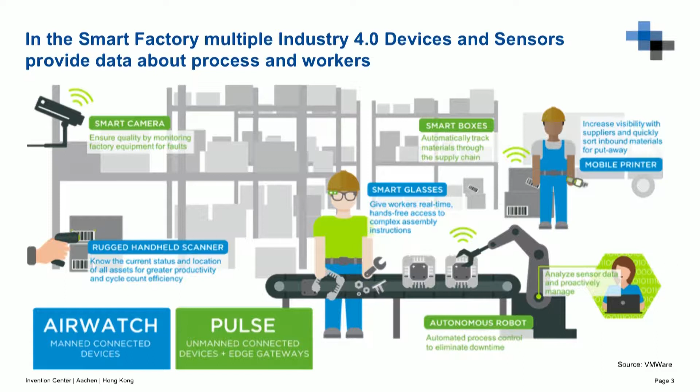What happens right now in the manufacturing industry is that on a shop floor level, where the actual production is happening, IoT - what we call IIoT, Industrial Internet of Things - is introduced into the production environment. This can be like a camera system. This can be figuring out about getting maybe smart glasses on the worker, understanding the maintenance cycle, how you maintain your products. It's about knowing where your product is basically running through the production process. We call this an intelligent product - you know where the product is, and the product tells you what processing needs to be done in order to add value.

So all those devices are basically generating a whole bunch of data. And on all those data, you can actually say they are like oil in the 70s - they are crude data you need to use to make sense out of it, to create value, to make a business opportunity happen. So how can you actually go, specifically for the manufacturing world, from big data generated by all those decentralized devices in the production, in the shop floor, towards making sense out of it - towards smart data?

So there has been a study by a consultancy company that was interviewing top-level management people, asking them: what do you do with IoT and data analytics? Why do you need it?

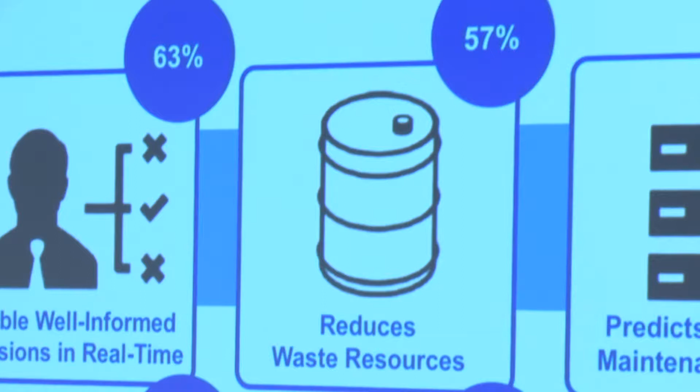Reducing waste is a concept coming out of Japan, from the lean production principles. Making things lean means reducing waste in your production cycle. Waste is always something where you basically lose money at the end of the day. Now you can use IoT technology and data analytics to help reduce waste in your production process.

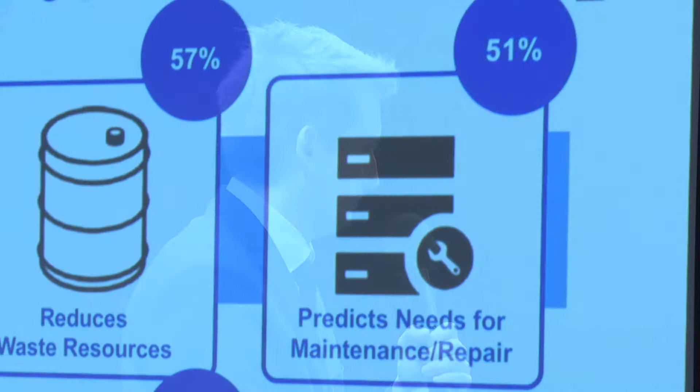It's also the ability to predict a downtime of machinery, for instance. What manufacturers do nowadays is run their machines—an injection molding machine, a CNC machine—and wait until it breaks down. At some point it breaks down when the tool isn't working anymore. So when it breaks down, it's always downtime, and downtime is losing money. It's basically something you don't want.

Nowadays you can measure sensor data at your machinery and see the deterioration, how a tool wears off. You can make a prediction—a linear or nonlinear regression into the future—and say, okay, it's very likely that it's going to break down in 2 weeks. So I have to do something before those 2 weeks are up, and you can prevent those downtimes.

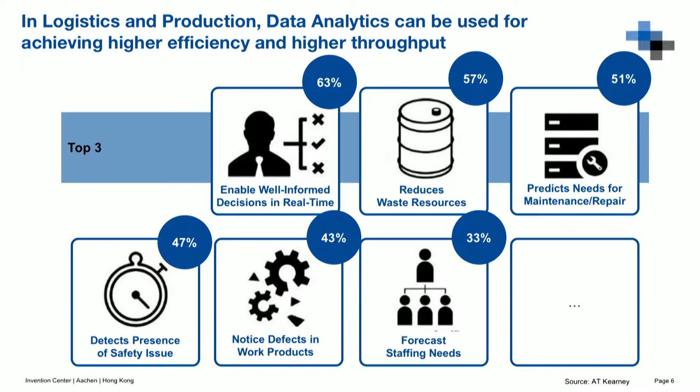Giving you some more examples. Who of you knows Kroger? Kroger is basically a big retail company, US-based, one of the biggest, actually.

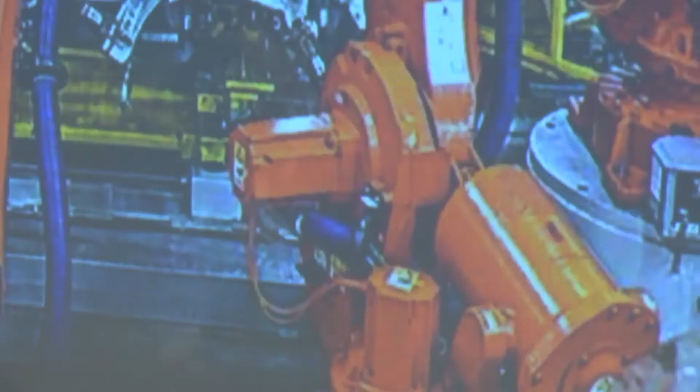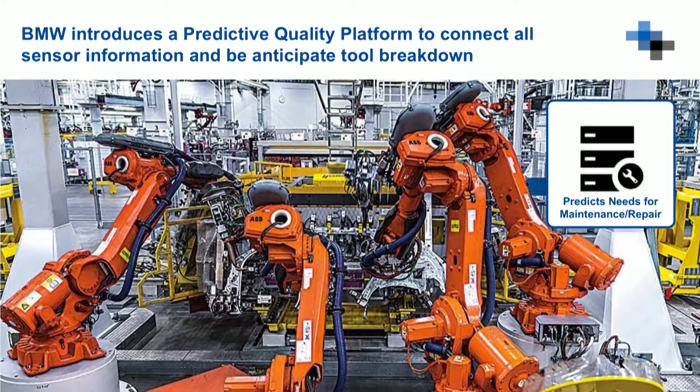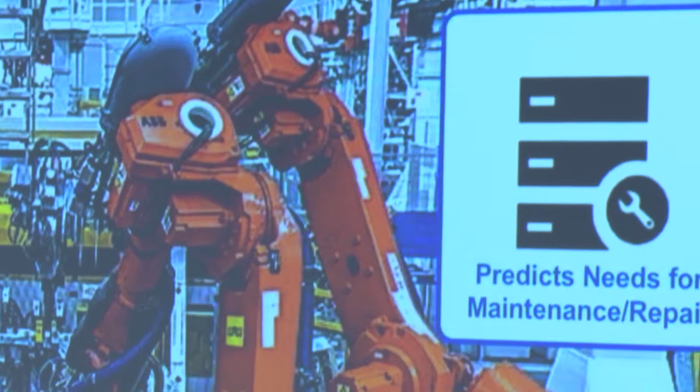Give you another example. This is a picture from BMW out of Munich, and they use data in their manufacturing to make predictive maintenance. They gather at certain points in the production line information about how often something is used, what is the weight you have to carry, what is the force of the clamps that have to carry certain parts of the car. They gather all this information in one central database. We call this a single source of truth, basically, a database that gathers all the information together, where you have enough information to make this reasoning happen.

To be able to predict in the future when we have to change a certain part or when they have to change a certain robot. So this goes all along. Data analytics and smart data goes all along with the Industry 4.0 revolution.

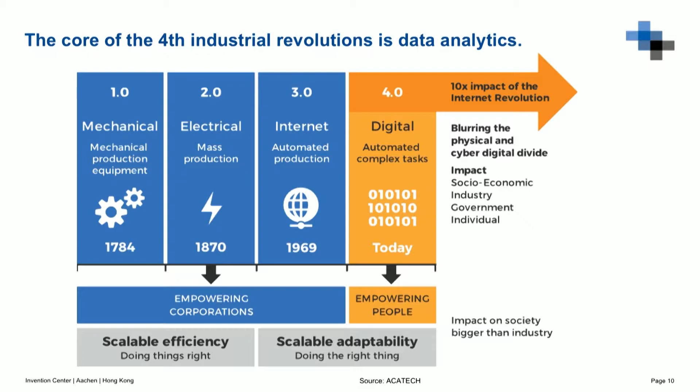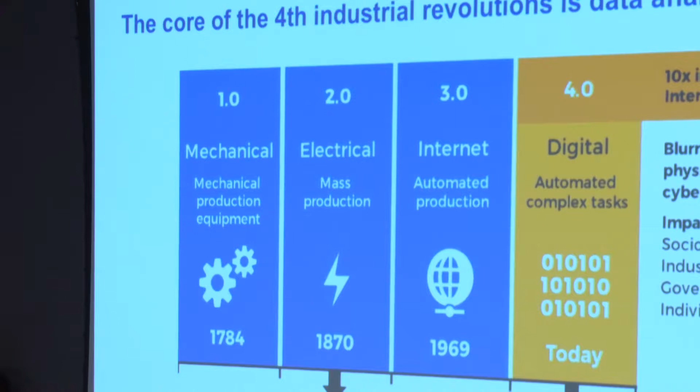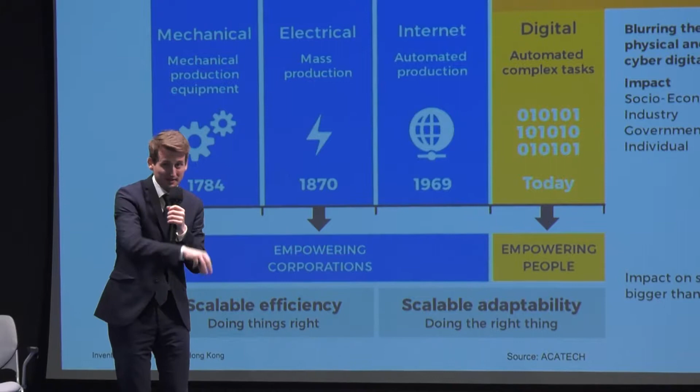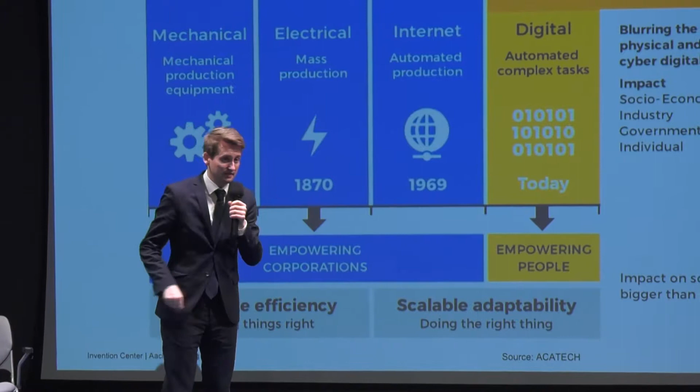As Mohammed already explained, when we look a little into the history, we first started off with the Industrial Revolution in England with the steam engine, the Watt engine, which used the force of steam to carry and distribute force in the production process. Then going over to mass production, first was the ability to do division of labor, so being able to have standardized processes in a production process and then do them in parallel. Later on, automation came into place, meaning PLCs, so logic, robots came into it, helping to make it a safer place, to not carry the heavy machinery anymore.

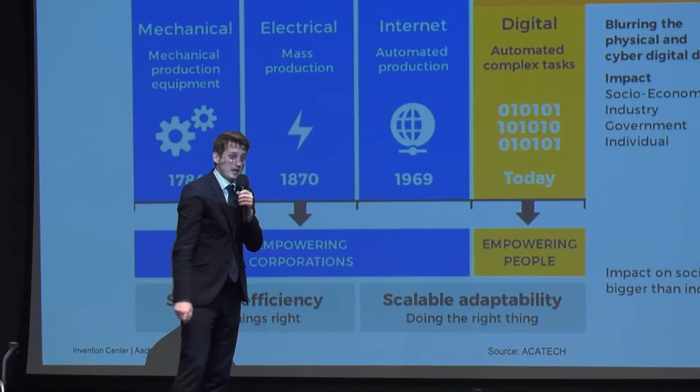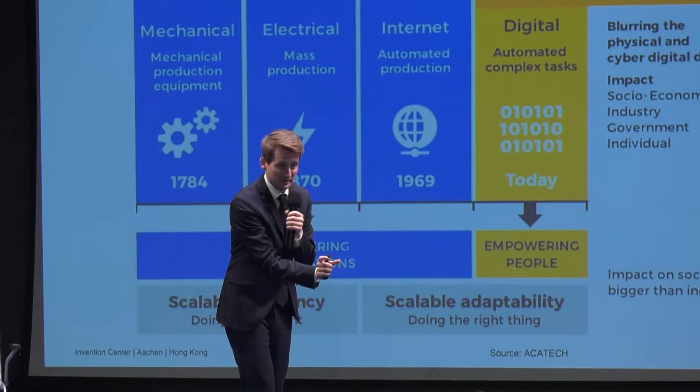And nowadays, it's data. It's actually the analytics of data, which is a bit different from what we heard before about the internet industry, where you already have a lot of data. Here, the challenge for manufacturers is actually to gather data, to make data available, to integrate the sensor technology, to have that data, to make sense out of it.

When we look at data projects in the manufacturing industry, we look basically at four levels of data analytics. First, we want to describe something, to know what is happening at the moment. We call it descriptive analytics - being able to describe a process, to push in transparency, to understand what's happening.

After that, we go into diagnostics - we make a diagnosis. We know what are the upper values, what are the middle values, what is the ideal value. We can actually say this is a good process, this is a bad process.

Then we are able to do something like a prediction - predictive maintenance, predictive quality control - where, out of the past data we've already seen, we say what is the most likely scenario that's going to happen in the future and when it's going to happen, and then react on this.

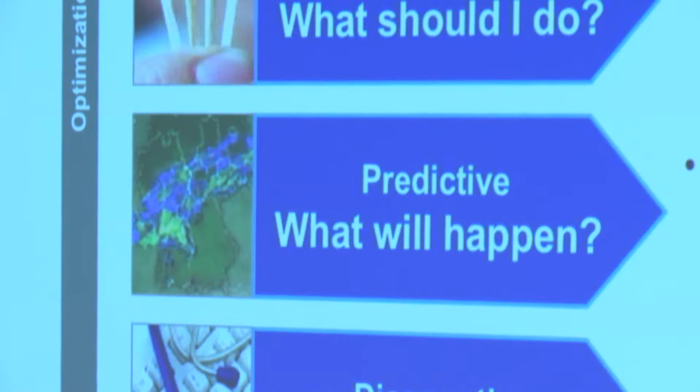Number 4 is what we call prescriptive. This is where we go into simulation. We have different scenarios, we can simulate different scenarios, and out of that can actually say, okay, how can we react? So we can actually simulate those reactions.

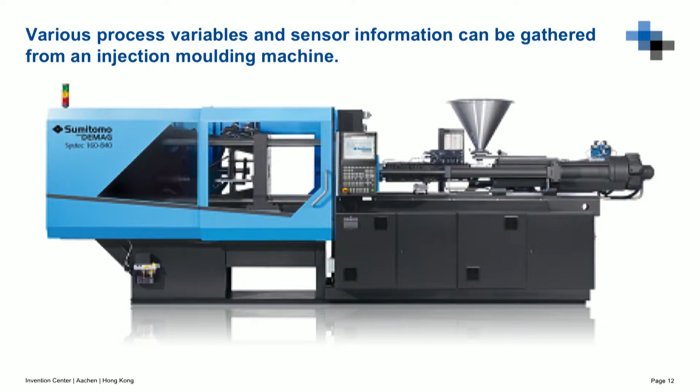Does anybody know what this is? Okay, this is an injection molding machine. This is actually the PRD area, and the Greater Bay Area is one of the biggest areas where they do injection molding in the world by now.

So injection molding is all the plastic you have - what you are holding here is basically injection molded. In an injection molding machine, you have something we call a mold, that's basically in here. A mold is where you push in the material, and you have something where the material comes in.

So the plastic material comes in here and goes down, and something like a screw gets pushed down and gets heated up, so that the material can flow. Then it's pushed into the mold, into different molds depending on the product. Then it cools down, and once it cools down, you take it out, and the process is basically done.

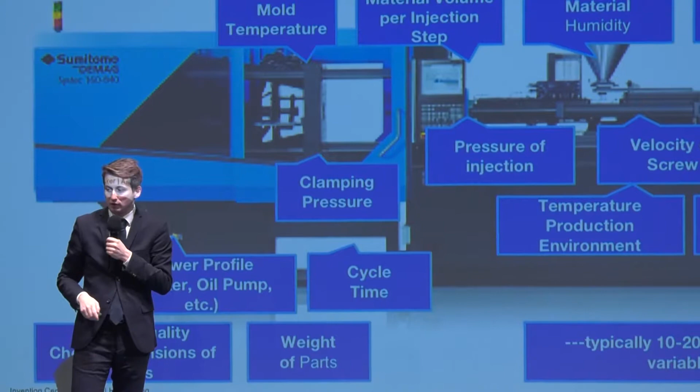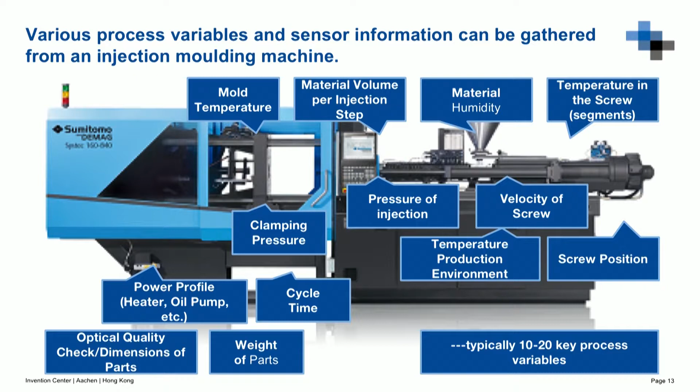So just looking at those machines, you have over 10 to 20 key process values. So sensor data you can look at. You can look at velocity of a screw, humidity, pressure, how's the pressure behaving, the clamp forces between the molds, and temperature. These are all influential variables of the process.

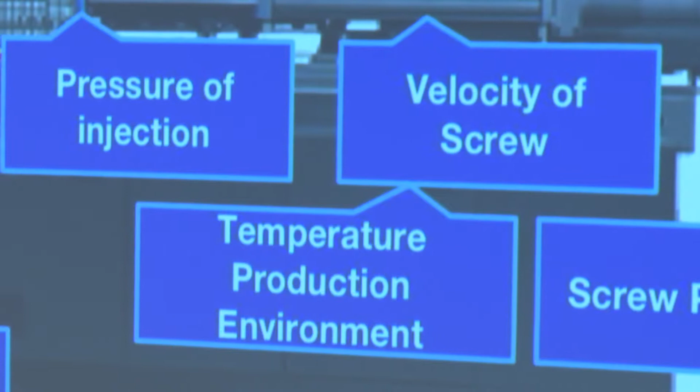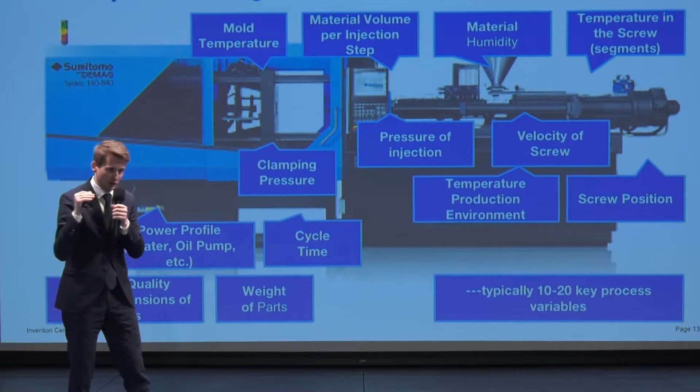So when, for instance, the outside temperature is a little bit higher, the quality of your process is likely to decrease. So there are a lot of process variables that influence the quality of the process and how well of a product you basically churn out of the machine.

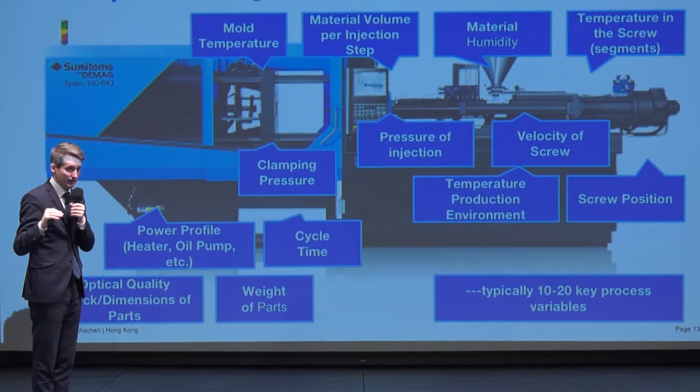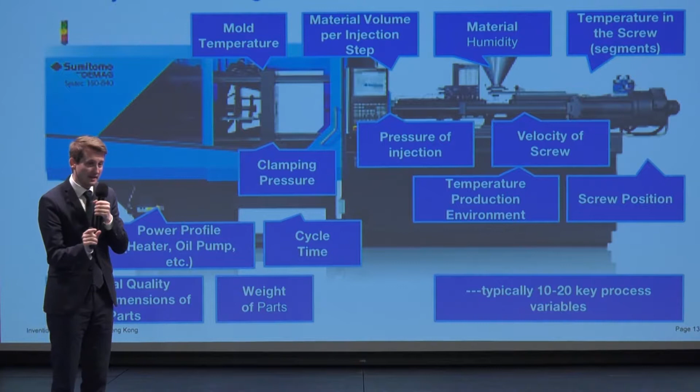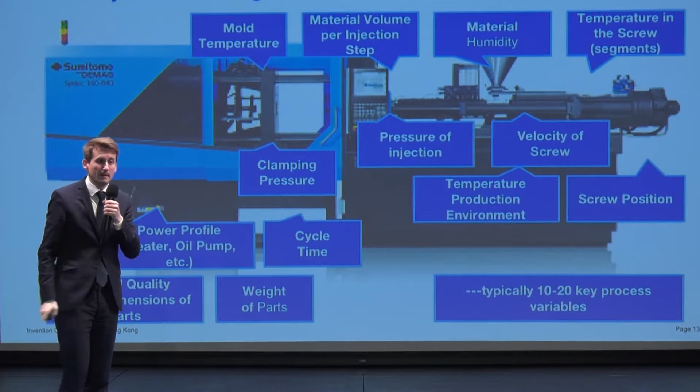What you want to do as a manufacturer is have a stable process. You don't want outliers, rework, or faulty parts. So in order to do that, looking into data analytics, you actually have to look at 10 to 20 key process variables at the same time, and be able to analyze if they are exceeding a value, if they are in a good state or in a bad state. You have to look at them at the same time to know the quality of your process and the quality of your product, because the process influences the product quality.

What we see now in the manufacturing industry is that they're just starting. They're not as far as the IT world, the internet world, where data is available. Here, the first step is making it available, putting in sensor units, getting a machine that is able to surveil or look at all those data and values. So as a first step, what we say to production companies is make it transparent. Be descriptive, describe your process, make it transparent, know what is happening in your production.

And for that, we look at something we call an OEE, that's overall equipment effectiveness. It's a KPI, a classic value you basically look at in the manufacturing world, coming from lean manufacturing. This tells you how good your shop floor is, how good your production is running at the moment.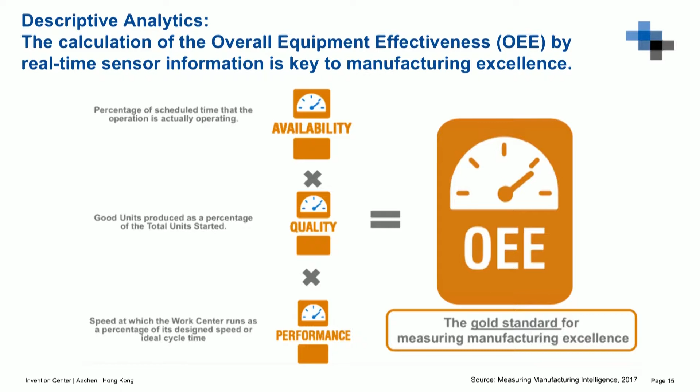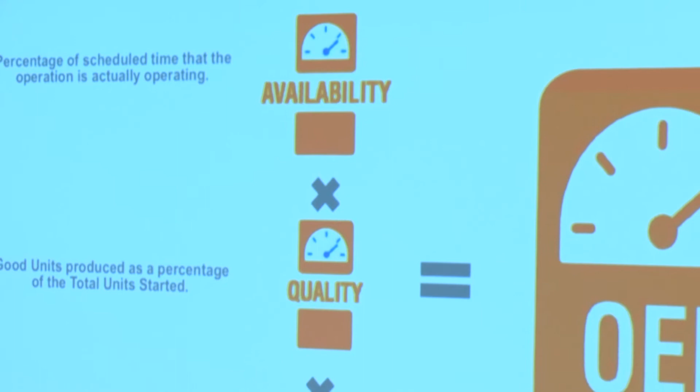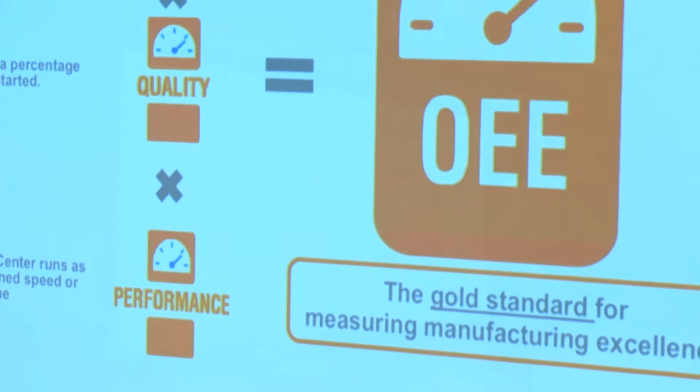And when we look at those OEEs, we look at something like availability, how much percentage of time the machine is really running at the moment. Then we look at quality, going back to all those values we just saw, the quality of the product that comes out. Do I have to do a lot of rework, a lot of faulty parts, or is it really running well?

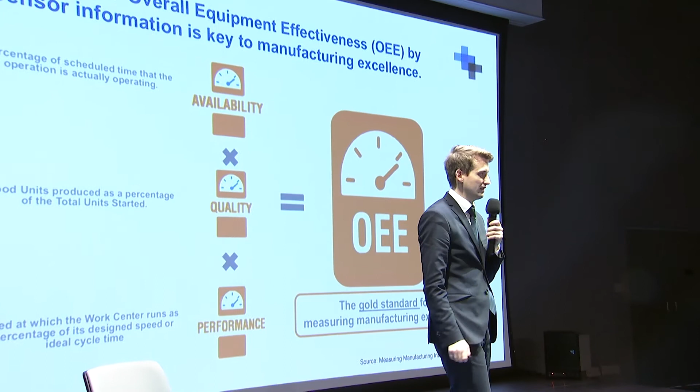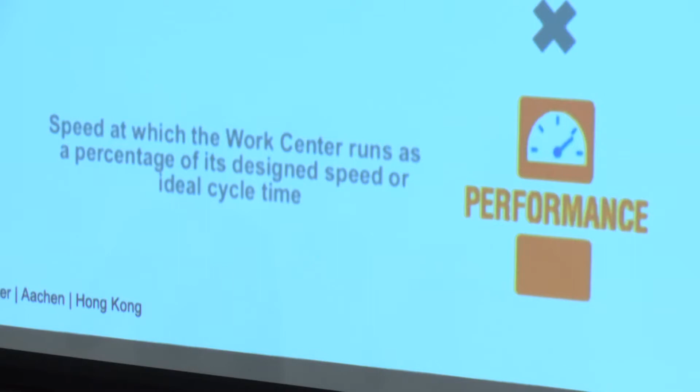And we look at the performance, how fast can you churn out the products? That's describing your OEE. The OEE is one of the parts very important for a manufacturer to optimize in real time, which is now possible with sensor information, instant information on your overall equipment effectiveness, to optimize based on this, to know how do I increase the quality, how do I improve availability, based on that real-time information.

This is just a rough calculation, because what often happens with manufacturers is they ask, when we have to put in all those sensor units, then I have to invest money, and when is my return on investment? We did a rough calculation on return on investment for OEE, for putting up those sensors, and we figured out that it's actually less than half a year before you can already get a return on what you invested in terms of sensors and hardware.

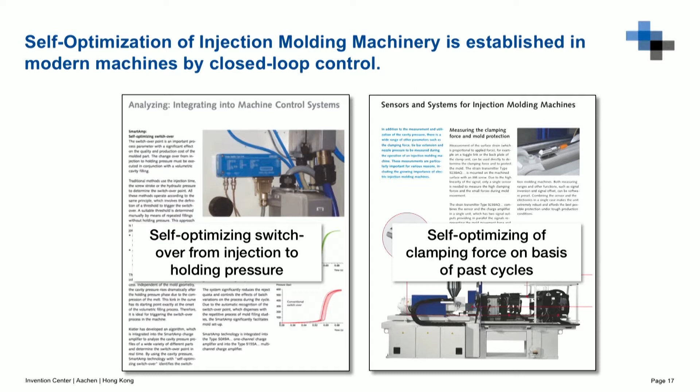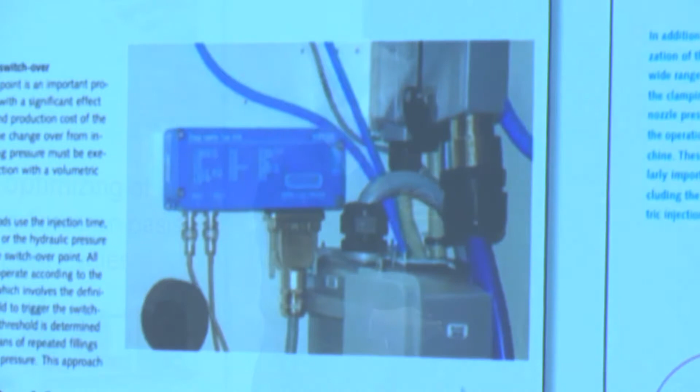So what other parts can data analytics be applied to? Going back to our example of injection molding, you can basically use past data from those sensors we put in to optimize the process. You measure the data, you have a model behind it, you model it, and then you push back to the machine, you actuate. That's what we call a closed loop: we sense, control, and actuate. Something like a closed loop.

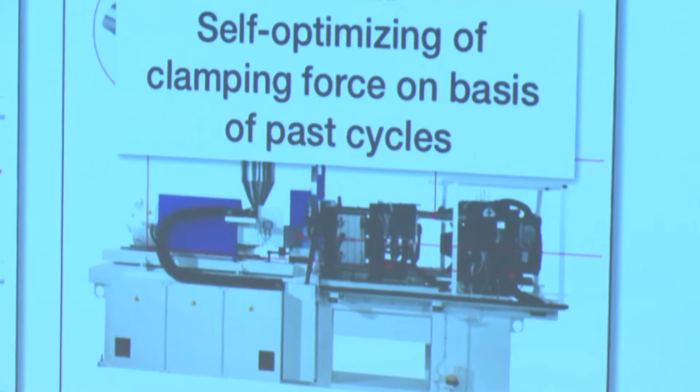And for injection molding, for instance, holding pressure can be optimized, the clamp forces can be optimized. There are different specific technical problems at that machinery where you can apply data analytics. Let me give you another example in the manufacturing world.

This is basically a smart box. So classically, or normally in those boxes you have small parts like screws or different layers, different metals. You have small parts you basically keep near your production and you have to assemble it, very much in the assembly process.

So those boxes you see here, they are not just boxes, they actually have a weight sensor. So you know the weight of the material inside, and you instantly know how much of the screws are in the box. When it decreases to a certain safety level, then you know that you have to reorder, to get new screws, without influencing the production process.

So the sensor unit, the weight unit, can automatically call the supplier and say, I need new screws, please deliver. And then the supplier comes to the box and refills it. Sounds very simple, but has a high effect in the production process because it helps you avoid downtimes and optimize the material you have in production, minimizing it to a certain level.

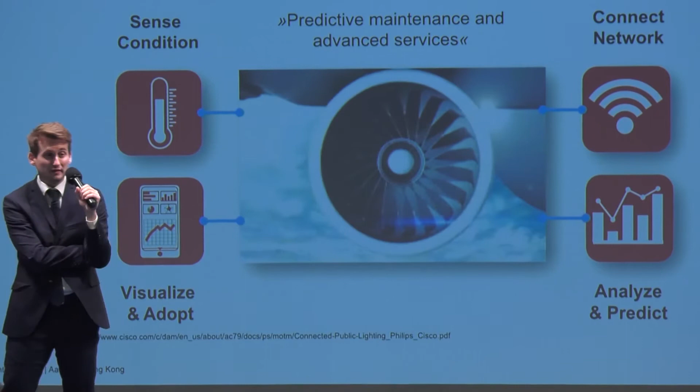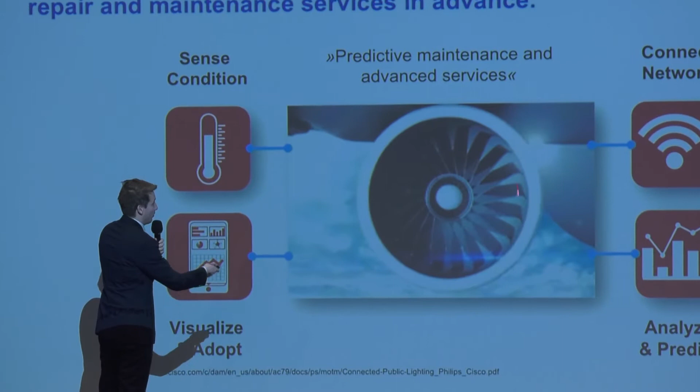Giving you another example for predictive maintenance: this is a jet engine manufacturer. So what they manufacture is basically those turbines, those big turbines you see on different airplanes. And after some time, they basically wear off.

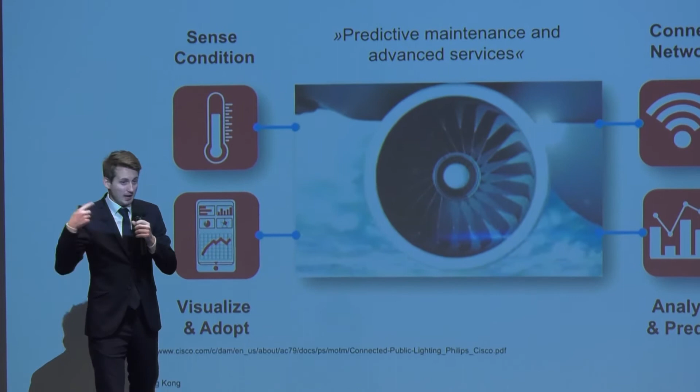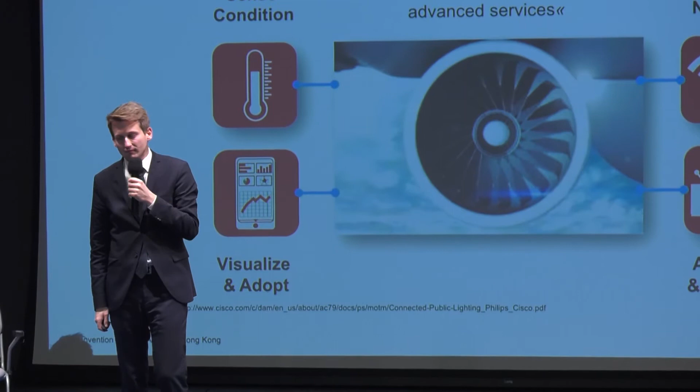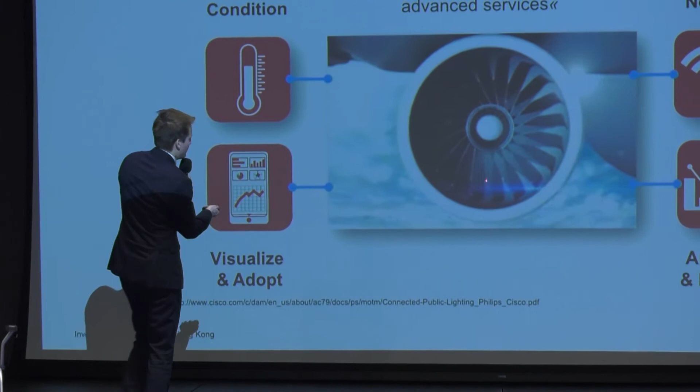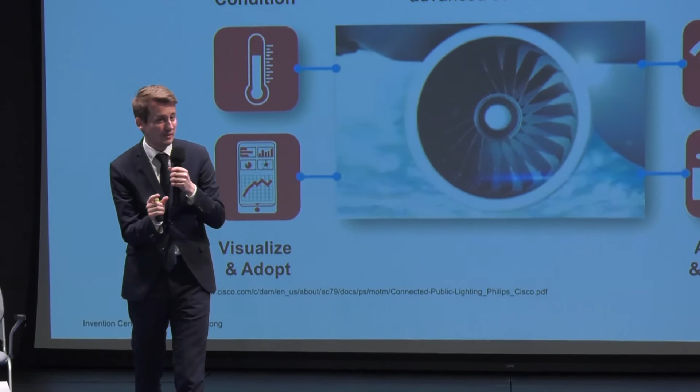You have to maintain them, you have to change them. You don't want to fall down when you are flying, right? So you need to maintain them. So what the jet engine manufacturer did, he introduced sensor systems in those propellers. So you know how much they are used, what force is applied regularly, and how long the force is applied.

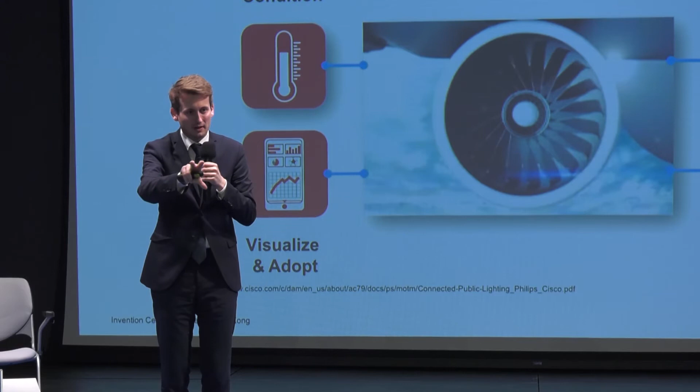And by that, he's able to predict when he has to exchange the whole engine. So he knows when to exchange the engine in the future, and he can actually offer the plane manufacturer a service. He can say, I know when you need me. And when the sensor units tell me you need to replace or maintain the engine, then I'm going to come to you and do the maintenance for you.

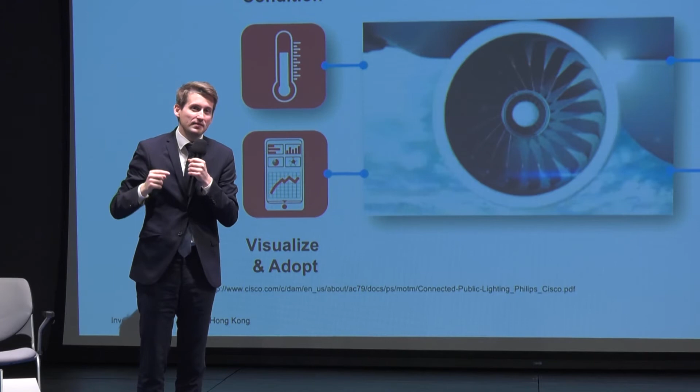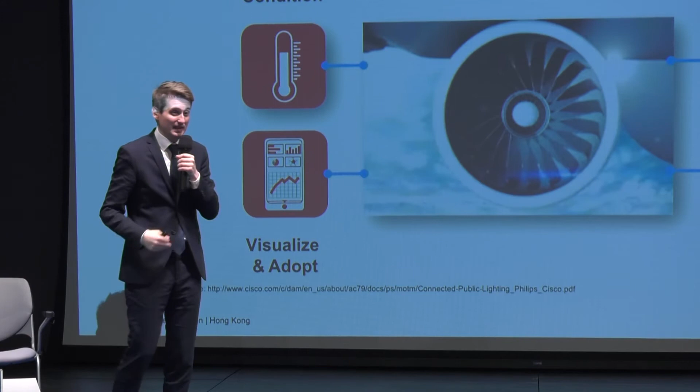So this case is very interesting because in addition to just measuring and doing data analytics, it even opens up new business models for the companies. It opens up a new business model for the supplier of those jet engines, because he can help his client much better by predicting when he has to do maintenance.

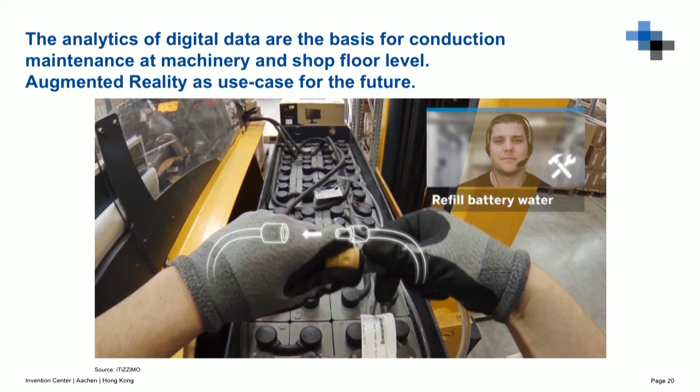Okay, I hope I was able to give you a little bit of an example in the manufacturing and production industry of what we do with data analytics.

Let me just talk a little bit shortly about the Invention Center. The Invention Center actually addresses exactly those topics, Industry 4.0. We look at both areas: we look into the production area with manufacturers, as well as into the early development cycles, where we help develop those products.

So we've been working with a lot of German companies. We're actually from Germany, so with a lot of German manufacturers together, and now had the opportunity to open up an office here in Hong Kong. We inaugurated in October, and we are basically now full in production, so to say.

And we address basically Industry 4.0 topics, we address data analytics, and we look very much into product and service innovations. What you can do, for instance, what we just saw with the jet engine manufacturer, the business model, we also look very much into this direction: what different business models you can actually make out of data.